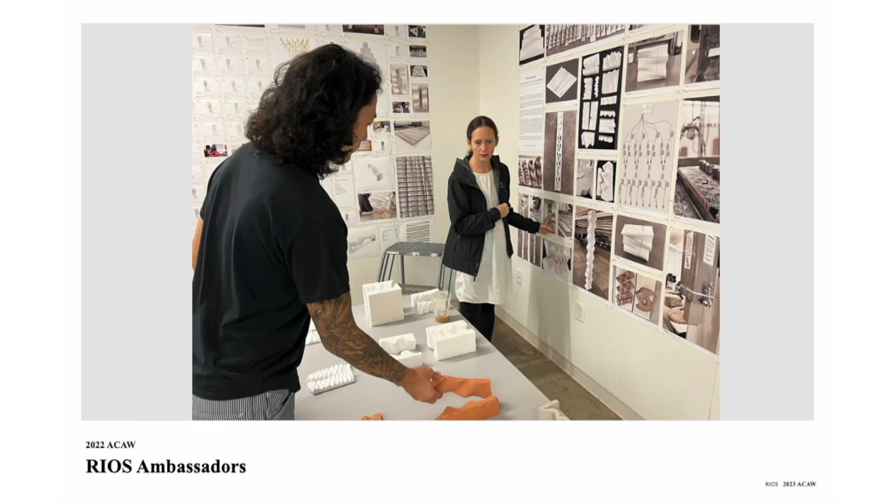So when we were asked to come, the first thing we did was to come visit the event last year and really just observe the energy that was going on and look at all the new research that had transpired in the 3 years that I had not been here, and really looking at, as everyone does, the forming techniques here, and the idea that the research would be to find limits and push the different fabrication techniques to the best of our application for our project.

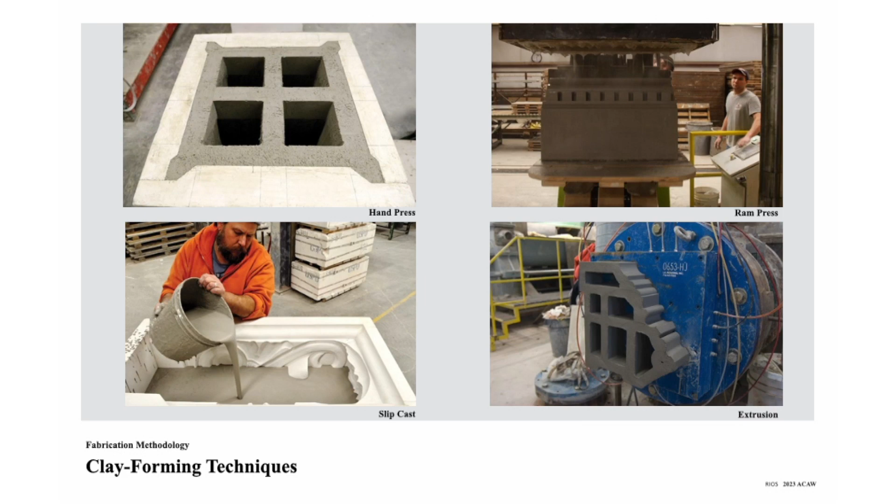And so once again, we had the typical assembly methods. In the end, we explored only a couple, which we'll go into later. But the abstract in general was, as you can see here, a tiled modular facade system that would allow for inhabitation and interacting with the environment and addressing notions about sustainability, low embodied carbon, operational carbon. These things are ubiquitous to the conversation today with construction in general, and these are definitely things that we thought about, as well as circularity and sustainability in general.

And I think in years past we've always focused on holistic designs that focus inwards on the building, and we really want to take that attitude and push it out towards the urban habitat and the larger environment. So in concept design, we had initially started looking at some of our earlier research at RIOS, which dealt with connectivity. And here you see some studies of research that we had done as a group, looking at pollinators and the notion of connectivity. So this is really focused on biodiversity and how our urban fabric can be brought to better health with gardens, green spaces within buildings.

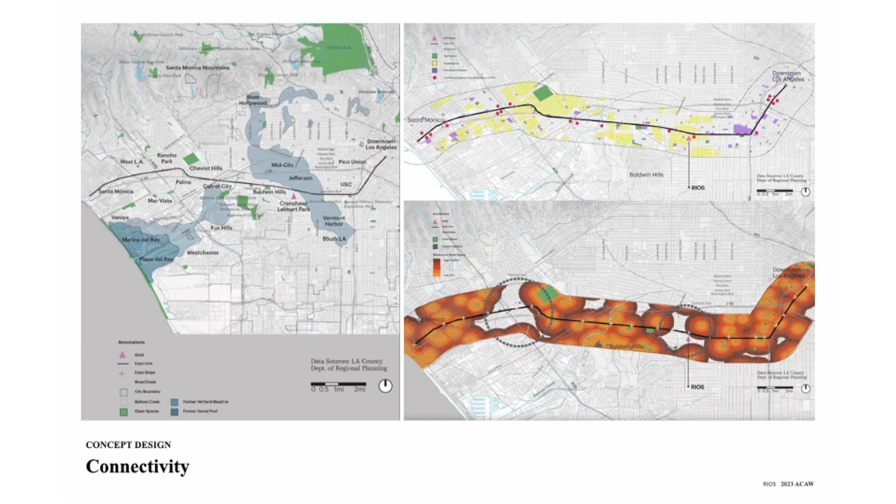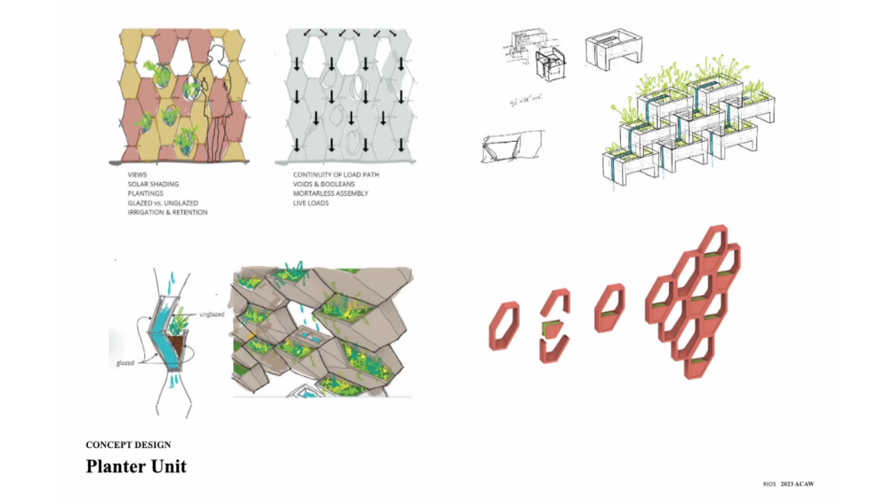A lot of our work is based in landscaping and master planning, so there's a lot of interest in this with our group. And further that, we're asking ourselves how we push that into architecture and what is the interface there. So this was an inspiration for a lot of the things that we looked at in modular assemblies. Early thoughts about how we could use passive irrigation as a method of introducing more performance into the blocks themselves, which could serve as sunshades as well. In the end, pollinators, which work to this biodiversity concept, but really trying to find a setting out module that was very flexible, so to speak.

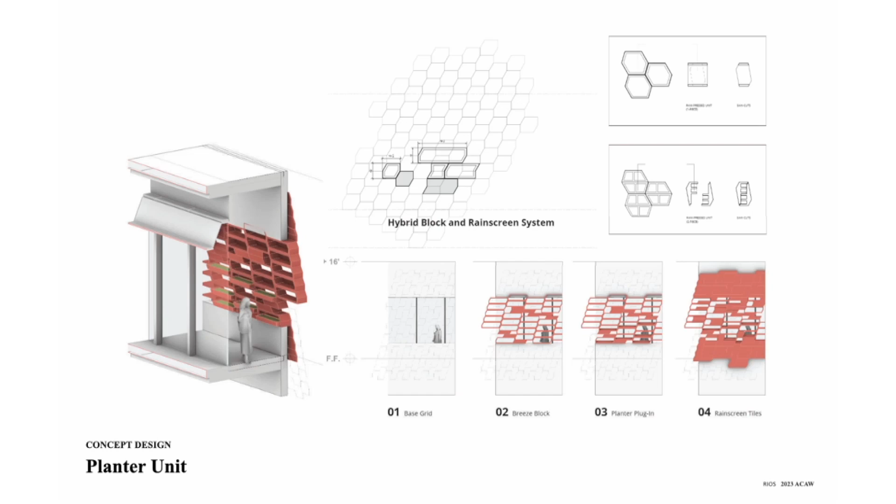And here's some earlier studies of some of our modules where we had essentially a setting out grid, a breeze block, and different modular components like planters and pollinators, which would enhance the facades and add variegation and larger interest. And as well, looking into the notion of systems, right? As we looked at the pollinator and planter units, thinking of different ways in which the modules themselves could be exploited to serve different functions. Here, a lot of the earlier studies looked at more active drainage runnels and whatnot, providing that passive irrigation.

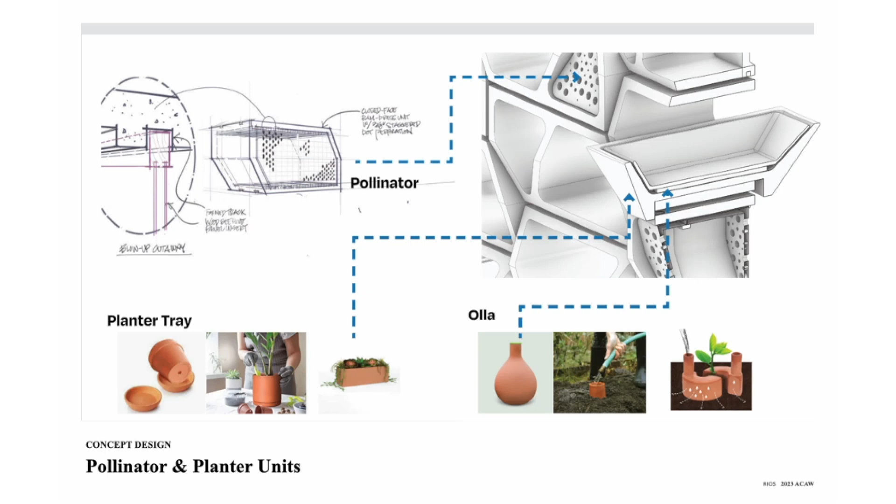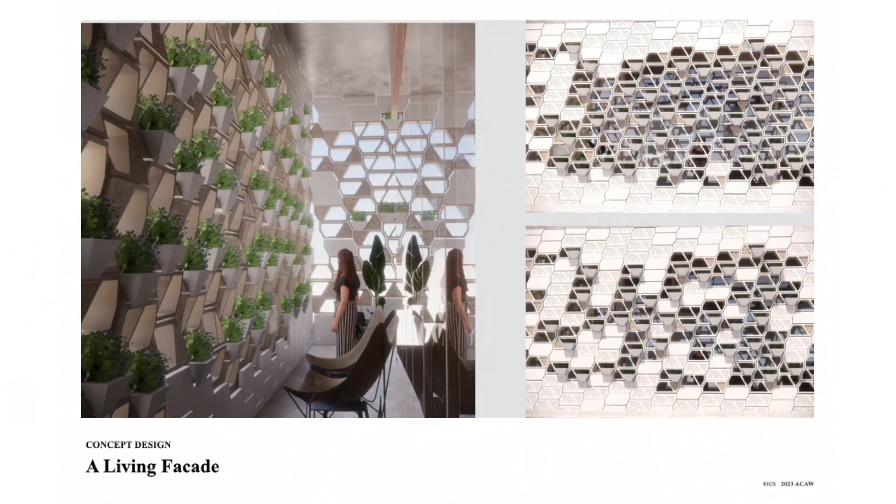We started looking at very simple examples of ollas, which are these porous vessels made out of terracotta, which are essentially feeding the soil just through transpiration through the body, and then planter trays, right? So there were these very base, simple notions of what those components could be.

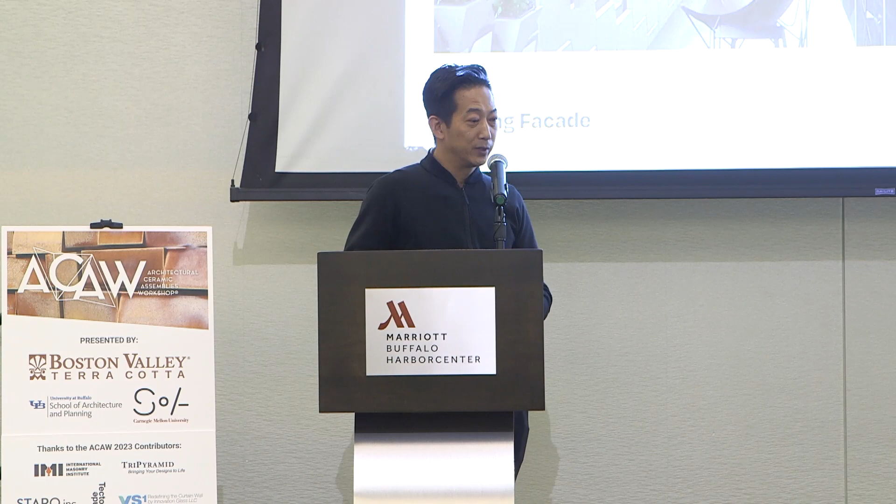And further than that, I think when we were thinking about the facade, we really wanted to think of it as something that the inhabitants would engage. And there's a notion of user-defined activity within this space that can be created between the thermal envelope and the actual facade itself. So in a sense, the space in between the thermal barrier and that screen is actually what we think of as a major focus point for this research.

And in the system development, finalizing on a pattern, we started really honing in on the constructability of this at a larger scale. What does this mean with a floor-to-floor system where, clearly, there is a slab joint that we didn't want to express as a straight line cleaving through these modular units? We can see those red lines there marking the slabs.

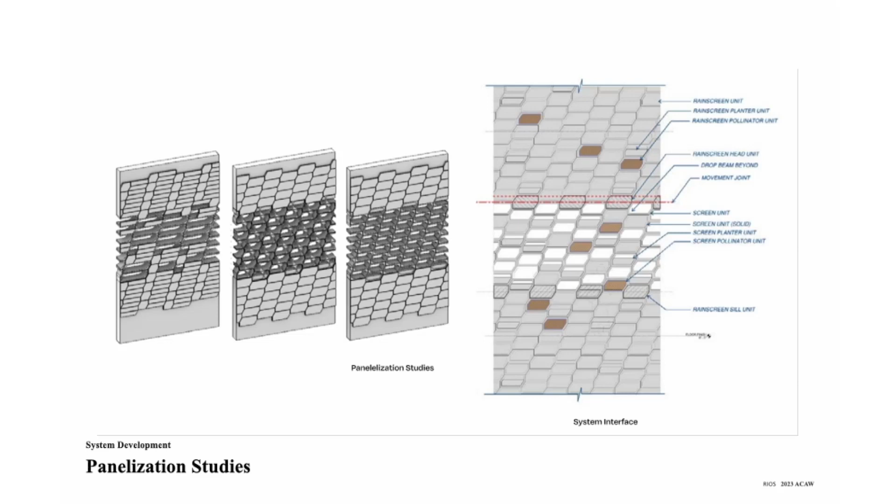And so this is the chassis or the framework for the system itself, which invariably is actually two systems. You'll see a more standard rainscreen system that is attached to a substrate, and then one which is purely a porous zone in the middle there that is actually a block unit. So in looking at a lot of these notions of porosity, we really wanted a facade that was inhabitable and had a certain finish to the back of it as much as to the front. So the notion of a concealed structure was important, as well as continuity in the pattern.

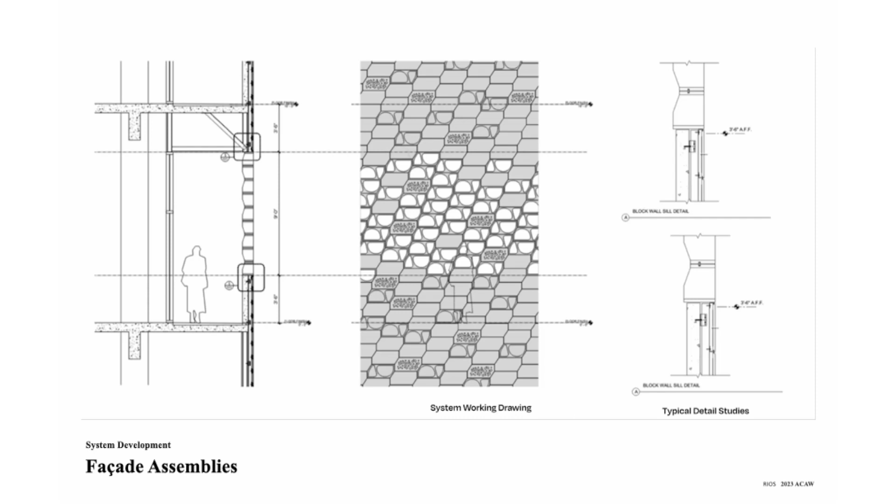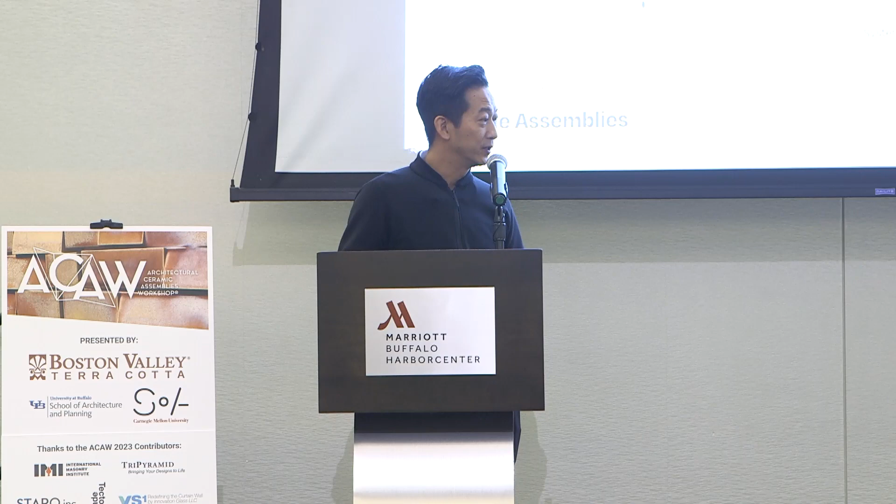And so here you see head and sill details, which would have to take up vertical movements, but more or less a stacked system in the middle here sitting on the sill. So rather conventional, the notion of high performance maybe being achieved more through multiple layers in the building. And this attitude too, in looking at the system, of eliminating a lot of backer steel structure and aluminum and other components which aren't really considered when we look at embodied carbon. We penalize materials solely on their own rather than looking at the full assembly. So that was a driver in looking at this.

And clearly, in the breeze block system here, it's about a 1 foot by 2 foot module, which had to have webbing for stiffening. Here we only have structural elements which are stainless steel pins, whereas the rainscreen requires an entire base structure, whether that's steel or concrete substrate, typically with the girts and the panel clips that hold the rainscreen assembly. So there's a certain simplicity to that breeze block system, right?

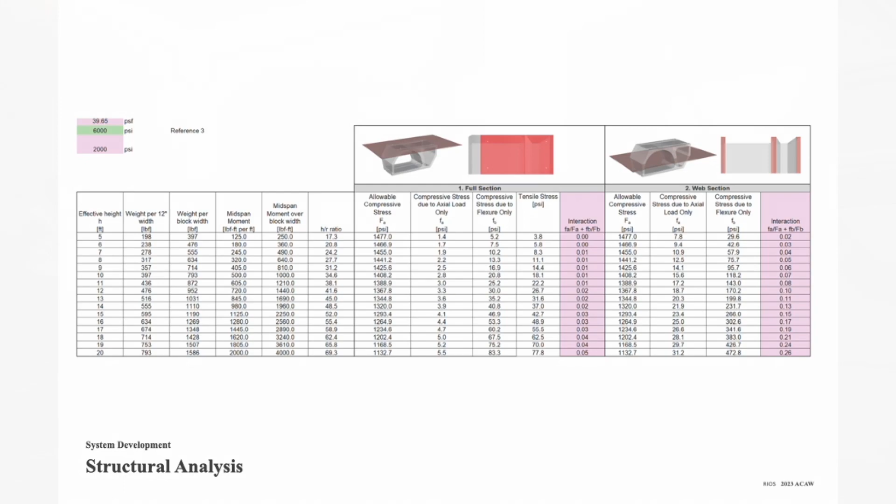Here's some analysis, some output from Arup, where they were looking at where the really important failure points were in this, or where we would really focus our attention. And that clearly is in that joint space between blocks, where the notion of lateral stability was really the cause for initial studies into the detailed design. And the lateral stiffness was really taken up by this final detail, which was kind of an extrapolation of what we had done in the mock-up.

Here you see the typical interface detail, with which we're able to achieve enough stiffness in the system and lateral stability that just by using a type N mortar and some stainless steel pins to resist the rotation of the blocks, we are able to span comfortably 7 feet, and pushing towards 11 feet we'd like to get to, and we need to do some more optimization and study on that.

But here you see further development on what the head and sill details would be, really to allow for the movement between the slabs, utilizing pins up at the top, which would have some sort of rubber grommet within the hole of the stack block unit that takes the pin, just to avoid any local stresses in the concrete itself. And below, at the base detail, it's essentially seated on a similar assembly as the typical interface, but it has a more robust plate that is creating this bearing surface there. So a really simple system.

Let's see, I'm not able to go further at the moment.

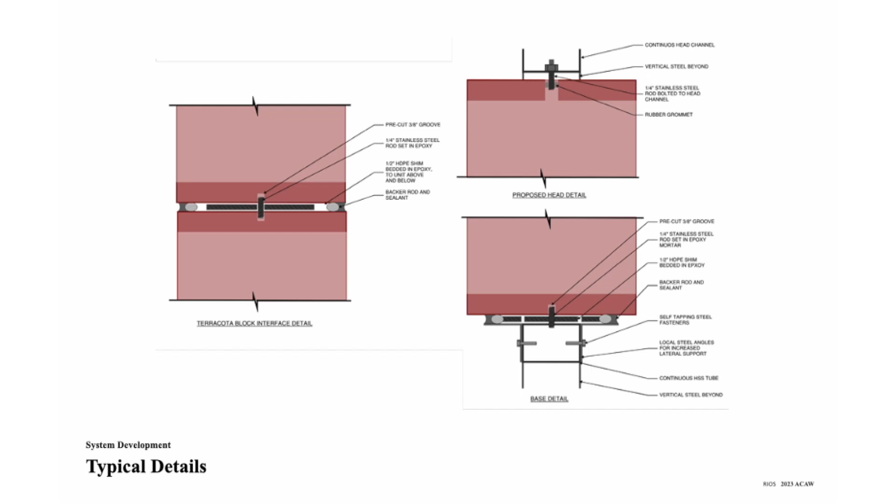There you go. And so we started looking at performance as well, and we really sited this. We had a site where we placed this at the end of the exhibition corridor, which is actually the end of that one diagram we saw in the connectivity diagram. And this is the west facing, obviously right on the beach.

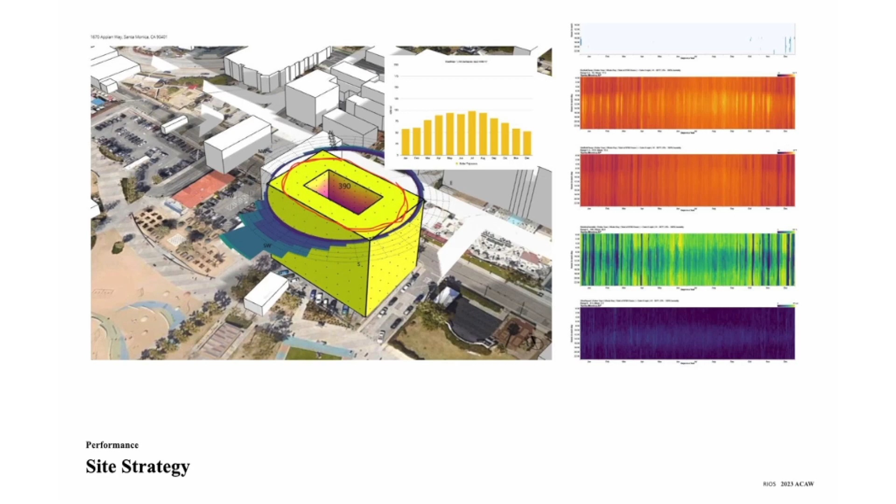And so looking at the screen and further analysis, typically the reduction in daylight annual exposure, we're finding that there's a 75% reduction in the solar exposure on the glazing just from the screen itself. On the left here is the initial location analysis by Arup, which established the values that we used for the daylighting,

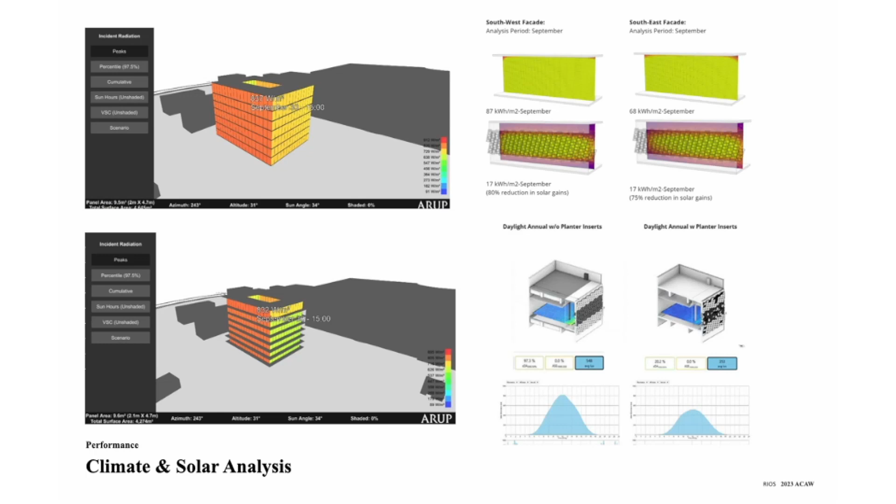and then subsequent solar analysis. But we looked also at glare, and I think we got down to just above ideal, around 320 or so. I can't read that perfectly, but that was with the sunshades, reducing it down from 548 lux, getting down to about 320. So it brings it down into a usable range.

And as much as we were looking at that performance, we're also looking at plant selection as a means of the pollinator aspect of it, looking at the different flora and fauna that can contribute to a healthier biodiverse planting scenario.

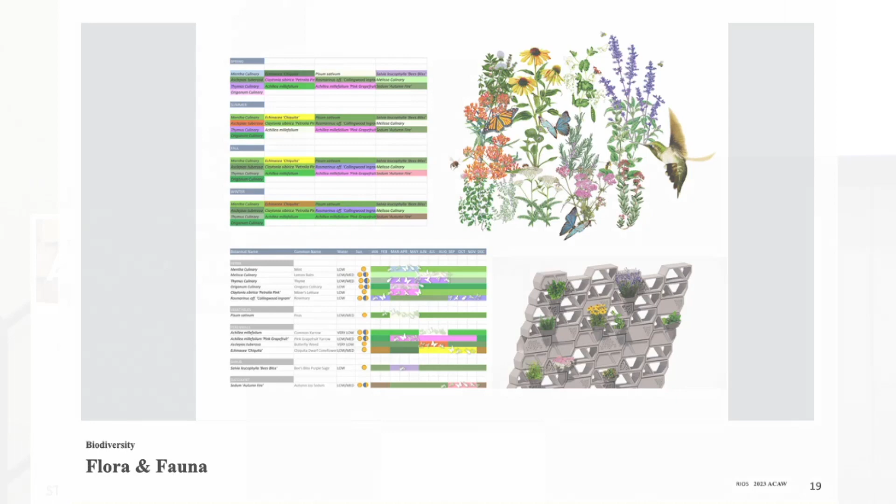And here we're looking at herbs, and we had selected here, you can see herbs and perennials. Basically, the perennials would attract a lot of these pollinators, and certain notions about low soil and low water needs. The selection was based on that, as well as the notion of how we could propagate these to allow for better air circulation and whatnot. So that was a driver in selecting the plants that went into that.

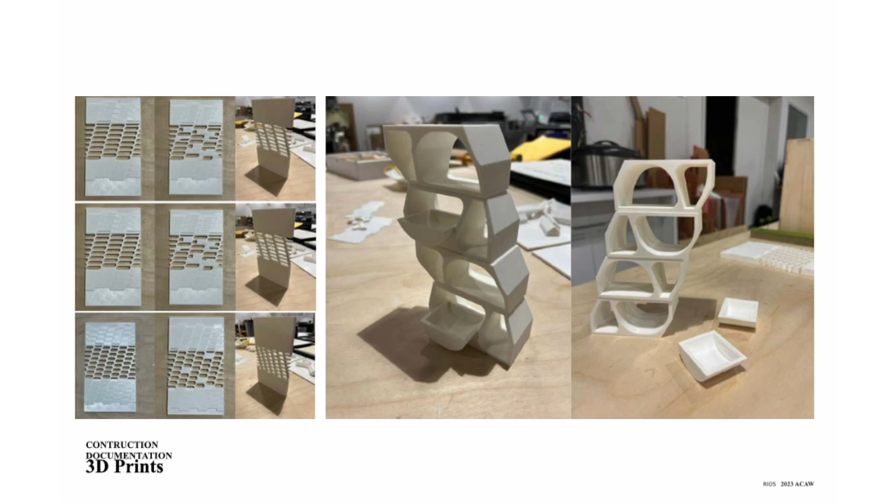And parallel to this, we were also looking at, there we go, the modules in a process of iteration, right? So here we're going through different studies where we're looking at the panelization at first, a few options here, and then eventually bumping up in scale, looking at the modularity of the planter units and whatnot.

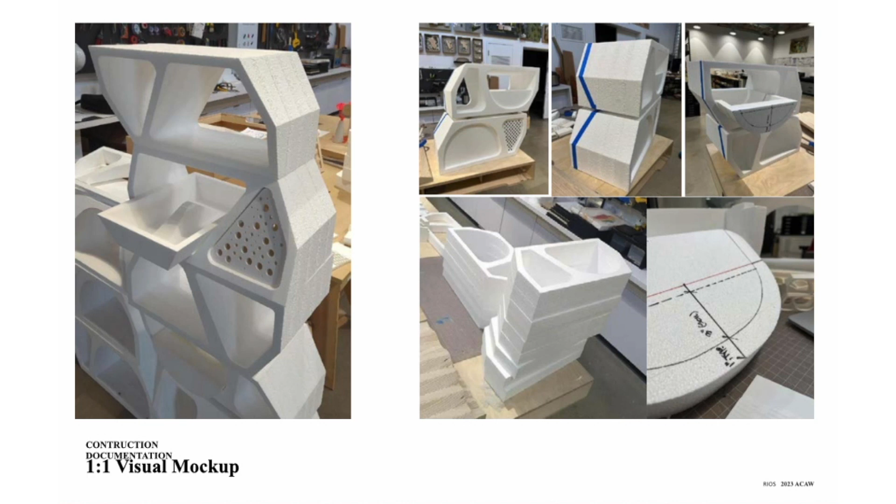Here you see a slightly different geometry, which was optimized later on, and similar to some of the other groups, really pushing this into full scale, just to see what the actual dimensions of this are, and to look at the detailing of it. And so the blocks were quite large. As I said, 1 foot by 2 foot.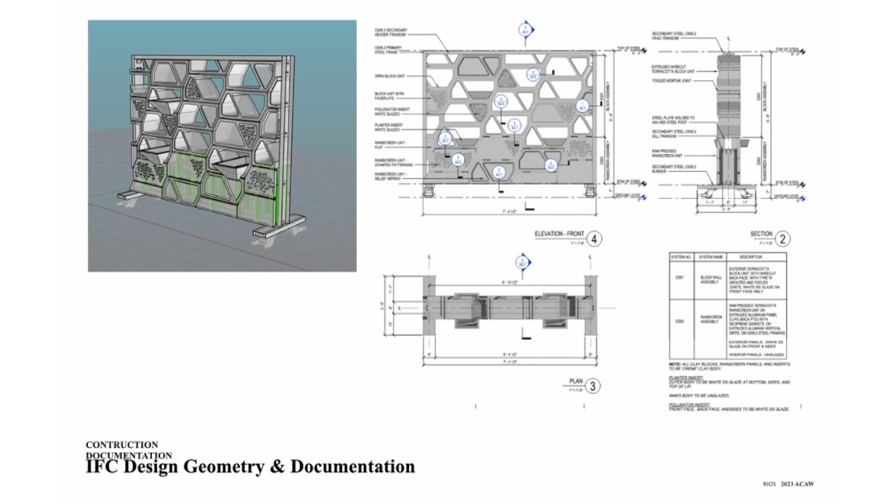This is part of our IFC set, so to speak, which we issued for the end of our research period in March. And this was used by Boston Valley to start their fabrication drawing process. When we received the model back, we took that as another opportunity to test things out, in this case, to sequence what our final fabrication assembly method would be.

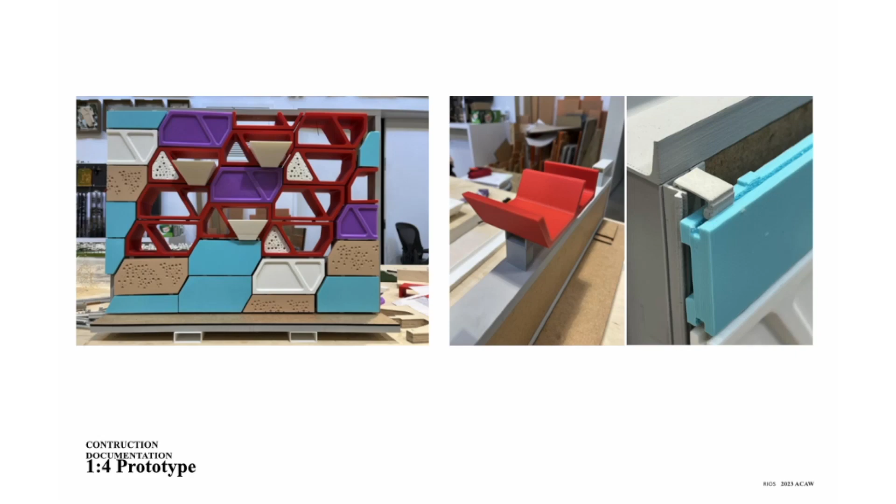This is a quarter scale printout, or 1 to 4 printout, which is actually full. There's no glue in this thing, even those little clips you just clip in by friction. So it was really good for us to stage how we were gonna do the actual assembly. And once again, taking that model and a lot of coordination back and forth and fine tuning the pieces. So that was a useful process. Having that kind of resolution in the model was really helpful.

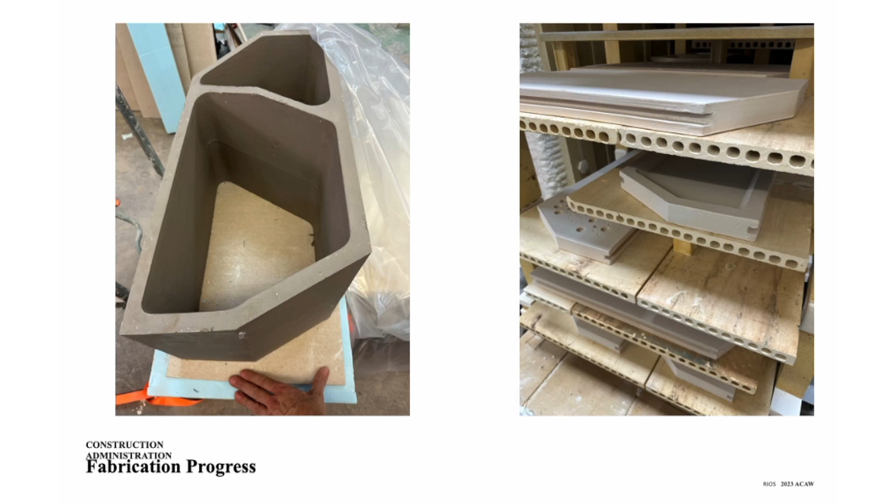And as with all things research, there were a lot of questions about how these modules would react in drying. These really large modules, there were some concerns about differential shrinking, and those things are all taken into account, but because of such a large scale unit, I think it was a bit of a test in and of itself what would happen.

The rainscreen panels you see there on the rack, ready to get fired with glaze, those are in fact all slip cast, as the blocks were for this exercise, but the notion is that the blocks could be ram pressed or extruded for the best efficiency. And these rainscreen panels as well would be ram pressed just based on their geometry on the face.

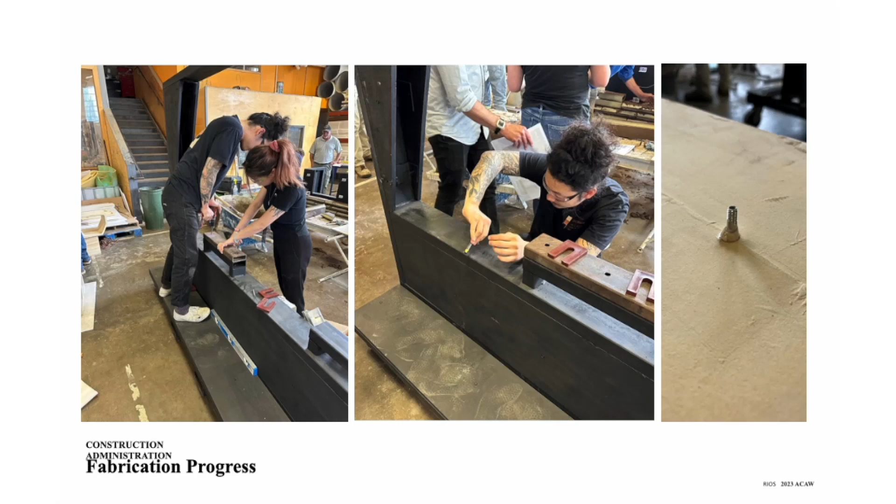You can see here we have epoxy shims. We did not grout this assembly for the sake of the mock-up, and you will notice that some of these units are foam. But I think we certainly got all of what we needed to out of the blocks that were terracotta. Here you see the group working on the actual block assembly as well, prepping some of the planters.

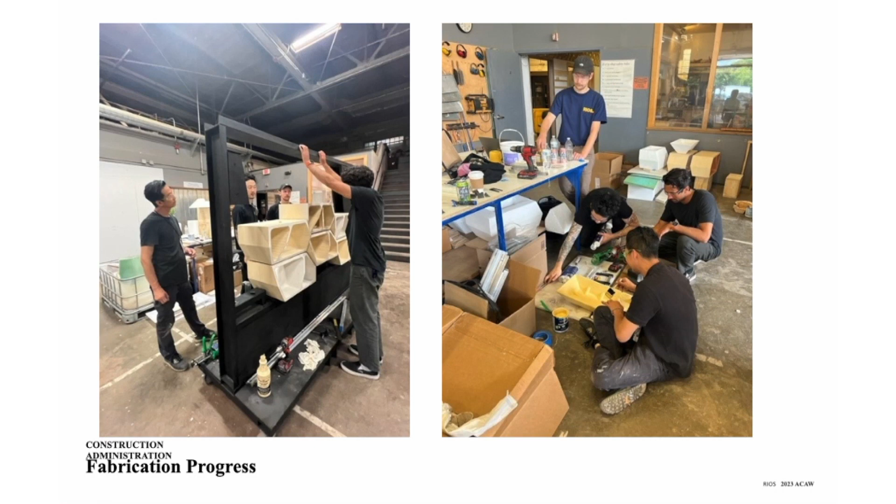Picture of Andy Brayman, who is cutting these rainscreen pieces, so the offcuts, and getting really good results with the Italian saw. Very precise and hardly any chipping at all, as you could see. And this is something we know from past experience, but it was really great to just do that all at the workshop on site.

And here you see one of our team members, Mimi, preparing this planter unit. So this is the inner shell of the unit, which is meant to be unglazed to absorb the water freely from the glazed lower vessel, which would act almost as a reservoir. So taken away from some of the earlier ideas of the olla and the planter tray and the really base level functionality, let's say.

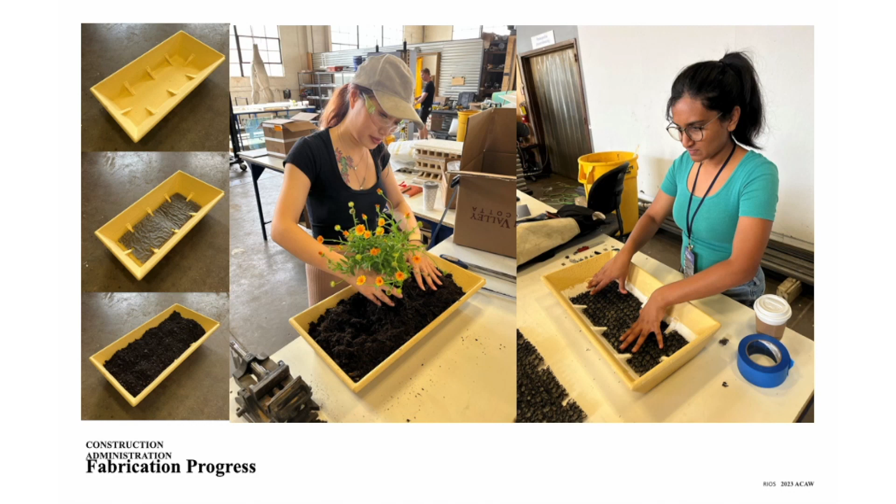And pictured Ravina, one of the student helpers that we had from CMU, and thanks as well to Yannick from Waterloo for giving us a hand on the blocks.

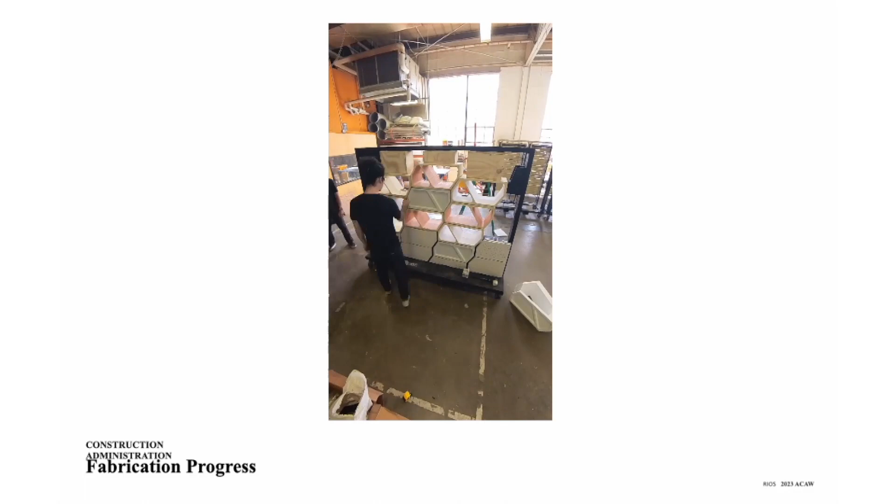A little quick time lapse here showing the group and the speed of this, which almost exemplifies how fervent the work was really. A lot of activity in a short span of time, and at one point we didn't know if we were going to finish, but hats off to the group. It was incredible. I'm really proud of what we did in the face of adversity. And here we see just the activity that went on with that.

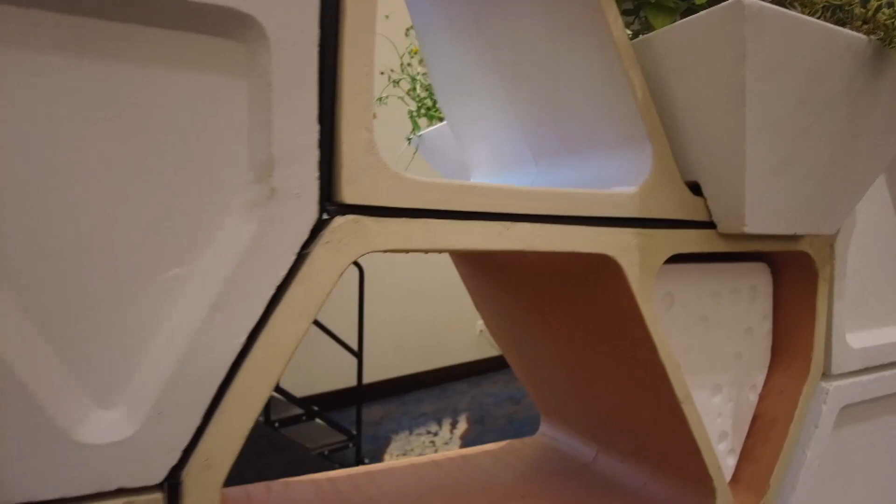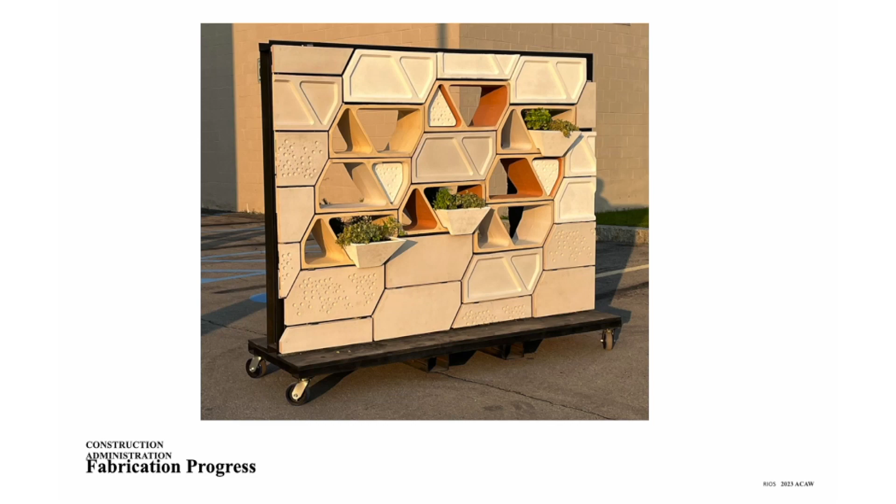And so at the end, we did finish on time, and we were able to get this thing outside. And one of the aspects that we were really curious about was, like I said, that living facade, and the ability of this facade to actually create an environment within that interstitial space that was highly inhabitable. And oftentimes you look at these spaces and they're very solemn, and they're not well lit.

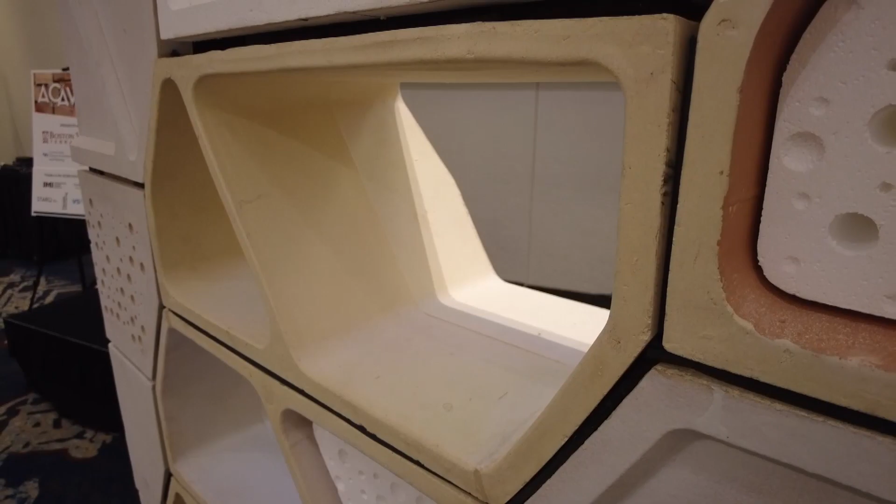And really, in this one, it was interesting because we didn't go to a glaze that had any noticeable reflectivity to it. In fact, some of these units that you can see are unglazed completely. Some have glaze on the inner, and then this salmon color body that you see up there was meant to be an actual through-body, unglazed salmon body color.

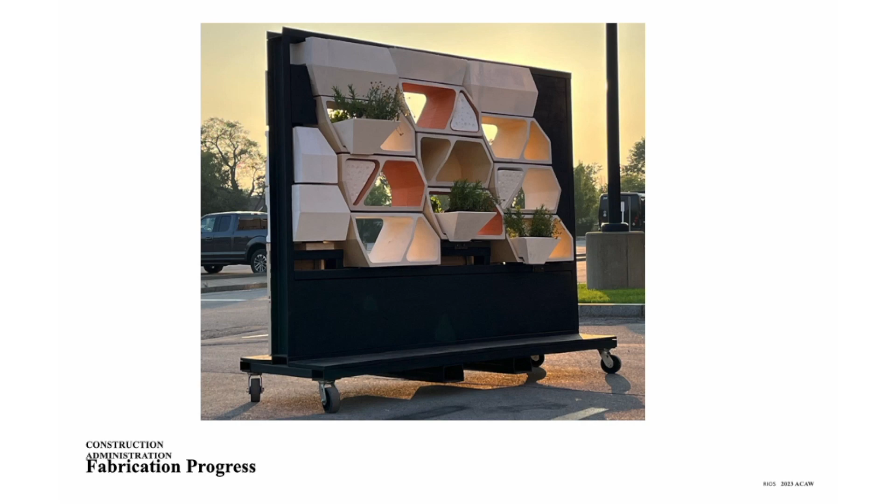And I think when we looked at the back and we caught some of the light coming through there, we were pretty pleased at the effects that we were getting, and we were getting little bees coming and checking out the plants, so that was cool. But yeah, I think this was full of surprises, and not all of them were great, but the ones at the end were really good. So we were really happy to have that little struggle.

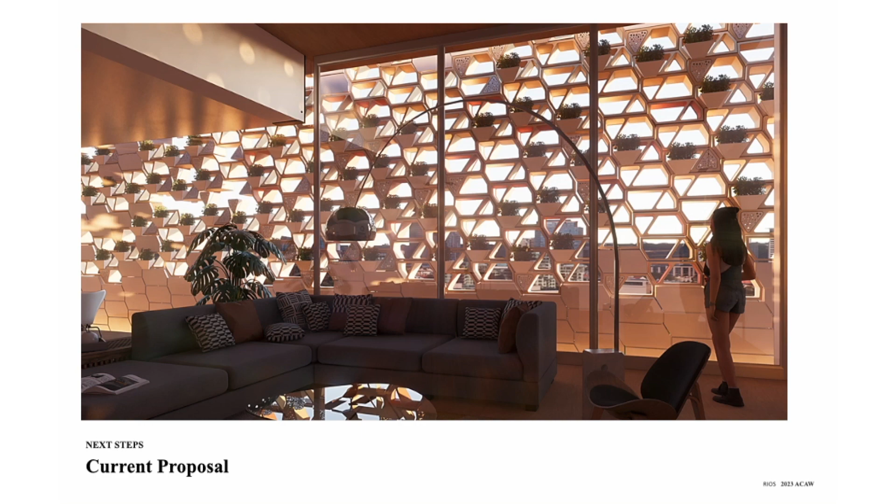And so here's the rendering of a potential living space. Here would be a residential application where one could open up operable glass doors and really even extend this terrace space into an interior space and promote a different, I guess, attitude to living, not dominated by all glass views and whatnot.

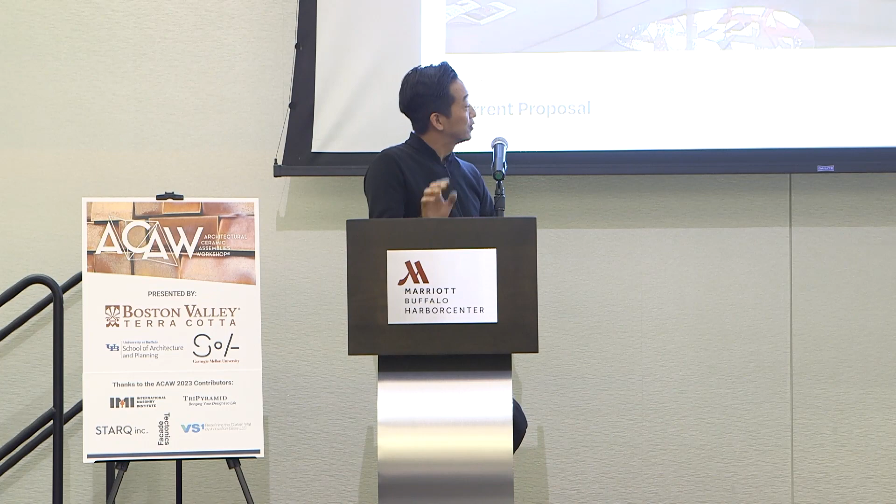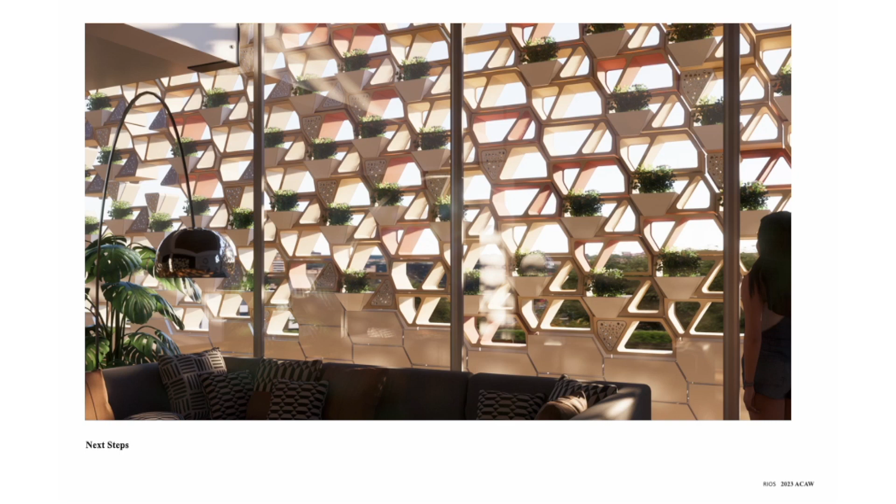And so, we'll end with these shots. These are, I think, pretty evocative for us. We're excited to see where this might go. And with that, I'll end with the shot of the group. So thank you.